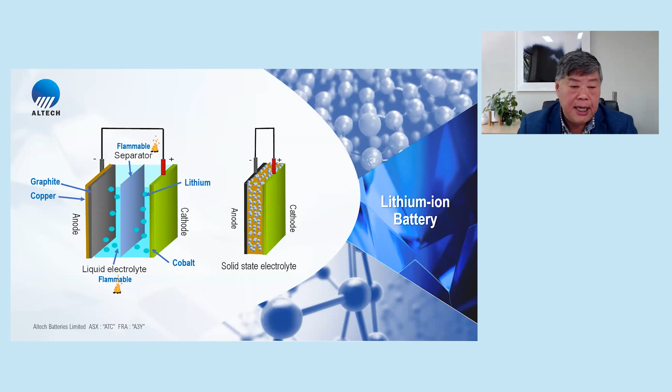In a normal lithium-ion battery, you've got a cathode and an anode, and there's a liquid electrolyte in between that, which has got lithium, but it's actually very flammable. What the industry is heading to is solid-state technology, where they're removing the liquid electrolyte and replacing it with a ceramic piece. The ceramic is a solid state, which allows the lithium to go back and forth without using that liquid electrolyte.

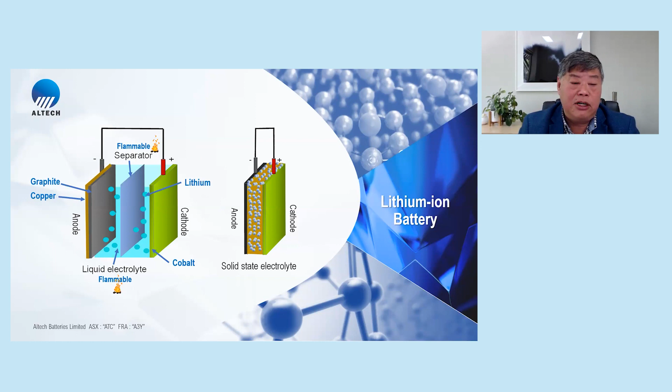So some of the challenges of the lithium-ion battery: there are fire and explosion issues. A lot of people don't realize that lithium-ion batteries only operate in a very narrow temperature range, down 15 degrees to 35 degrees. In fact, when you have your lithium-ion battery in the very cold, your battery slows down to about 70%. Also, there's a limited life of these batteries because every time you charge and discharge, lithium ions degrade, so generally 8 to 10 years in the bigger type batteries.

The other concern is critical metals. There are price rises in critical metals in these batteries, and that is also a concern. So let's talk a bit about that.

Lithium price has risen fivefold in the last 2 years, and that's causing some concern to the lithium battery sector. Cobalt supply, which is a key ingredient to some of these batteries, comes from the DRC, and there's some ethical concerns about child labor issues and so on. 90% of graphite comes from China, so the industry is concerned about geopolitical risk. Copper is an issue—there is a copper crunch coming. There is a study that shows there's not enough copper mines being built or developed to even meet the EV demand, let alone grid storage demand, and obviously also materials like manganese.

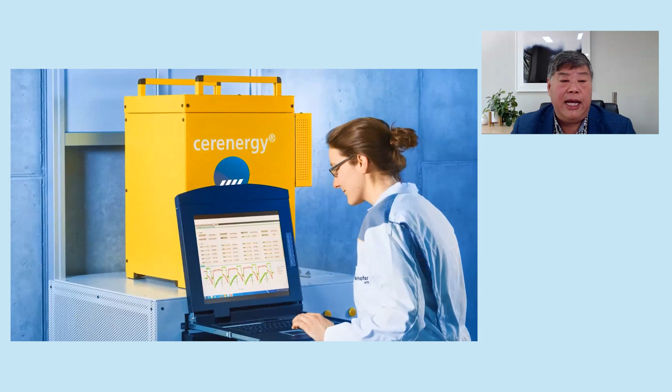Well, introducing you to the Cerenergy battery. Essentially, this is a sodium chloride battery, or salt battery, with nickel metal powder. So that's what they look like. The technology was developed by the Fraunhofer Institute in Germany. They spent nearly 35 million euros in development over 8 years, and we have a joint venture to develop this technology.

So it is actually a sodium chloride battery and solid state. It doesn't have that liquid electrolyte, so it uses a ceramic piece. Therefore it's fireproof, because there's no volatile, flammable electrolyte in the battery. The temperature range it operates: down to minus 40 degrees and up to 60 degrees. So you can plop this battery in the snow or in the desert, and it'll operate without any cooling fans and so on.

Because we use sodium, not a very reactive material like lithium, it doesn't degrade every time you charge and discharge the battery. So the life of the battery should be beyond 15 years. We don't use any lithium, as I mentioned—we use sodium chloride. We don't have any copper in the chemistry, so there's no copper requirements, no cobalt requirements. And there is also no anode in the battery—it's actually a self-forming anode, so we don't have any graphite or copper.

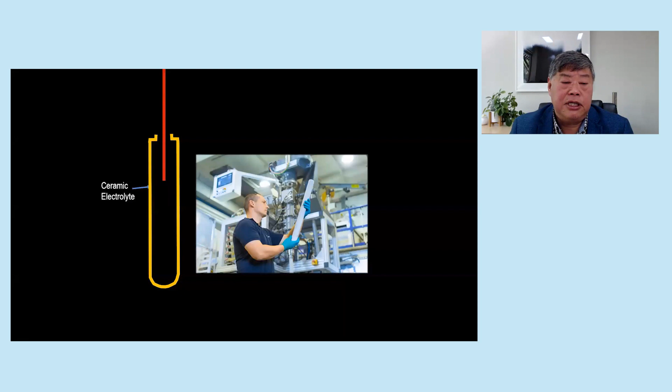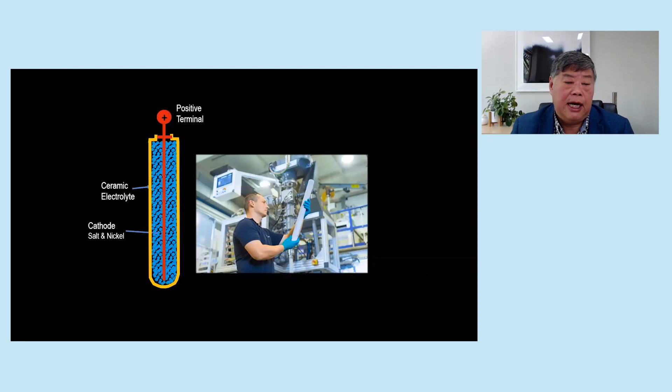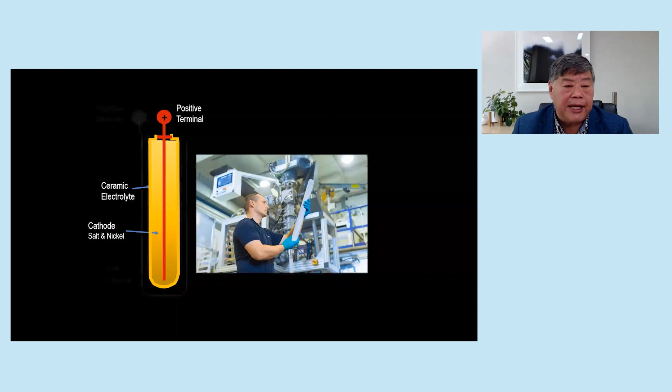So let me show you the technology and how this battery operates. Essentially, you have a ceramic tube, and in the ceramic tube there is a positive probe. We fill the ceramic tube with sodium chloride and nickel powder, and there is a medium of sodium alumina medium in it. The ceramic tube, as you can see in the picture there, sits in a metal canister, which acts as the negative part of the battery. So you've got the positive probe in the middle, and the cylinder is the negative part, as you can see in this picture of the ceramic fitting into it.

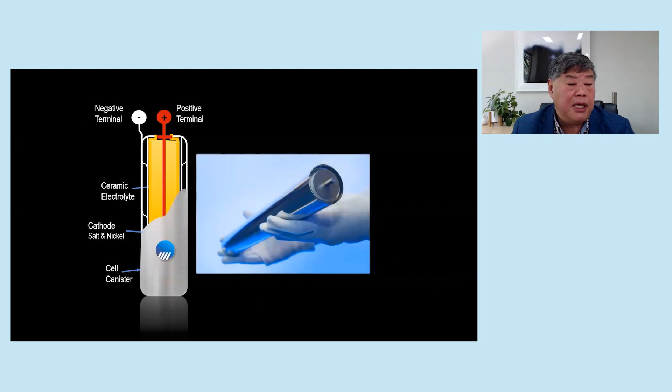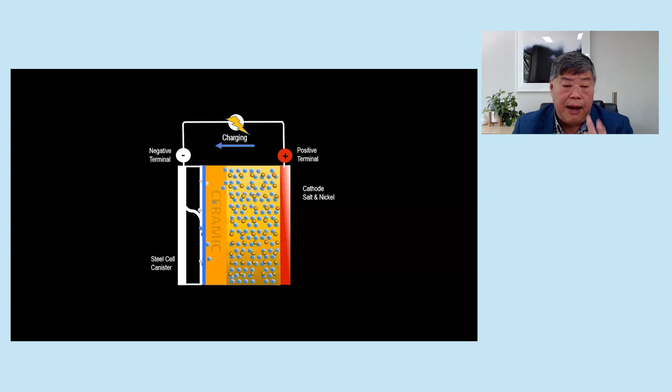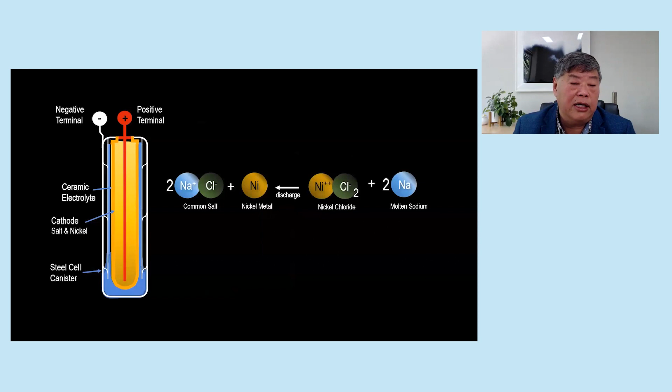This battery, the way it operates: when you charge the battery, the sodium ions migrate through the ceramic separator and build an anode—it's a sodium anode that's being formed. When you charge the battery, the nickel is there to grab the chloride and allow the sodium to migrate. If you take a cross section of the battery, you can see the molten sodium being formed. So the unique part of the battery is it's a self-forming anode and a self-discharging anode. Very unique technology. Here you can see the battery discharging—the sodium ions are now migrating back, grabbing the chloride and becoming salt again. Very interesting technology here.

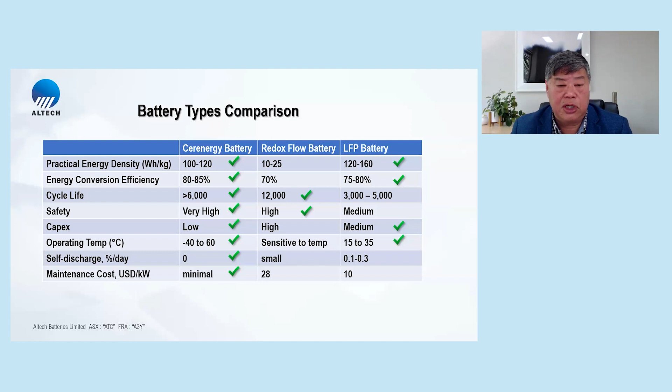The main point in this slide is the maintenance costs. It actually has virtually zero maintenance costs. In an LFP battery like the Tesla Megapack, there's something like 240 cooling fans trying to keep the battery cool. In our battery, it actually looks after the temperature itself, because when you charge the battery it's an endothermic reaction, and when you discharge the battery it's an exothermic reaction. So it monitors the energy.

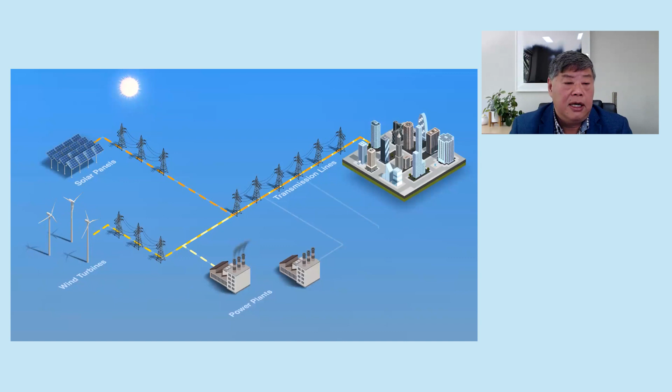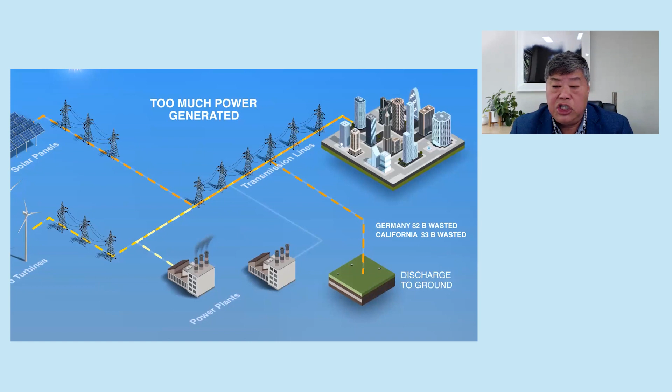Our market is actually the grid storage market. We're not looking at entering the EV market. If you look at this animation, we generally generate power during the day with solar panels and so on. But what a lot of people don't realize is that during the day, Germany discharges about $2 billion worth of renewable energy to the ground, and California something like 3 billion, because there's an excess of power during the day.

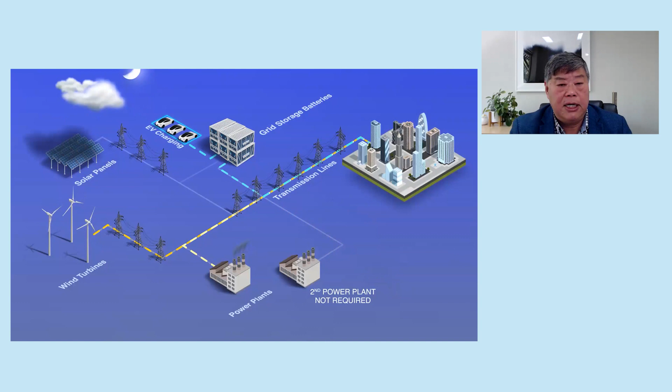Now the future of EVs, as more and more EVs come online, they're going to draw a lot of power during the night when they charge up, and so you actually need grid storage batteries. A grid storage battery just sits on the grid. Essentially during the day when the sun's out, they charge these batteries, and at night they discharge the batteries. It's an energy shifting exercise.

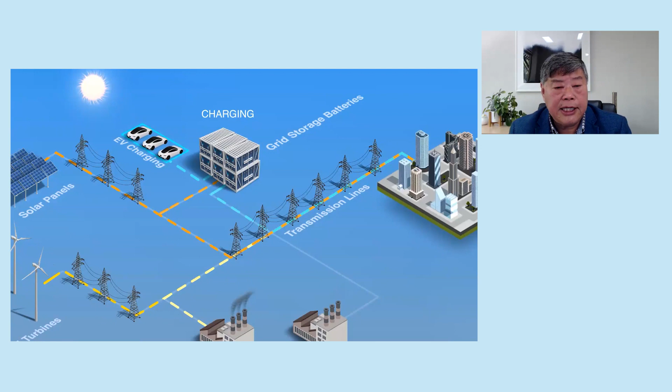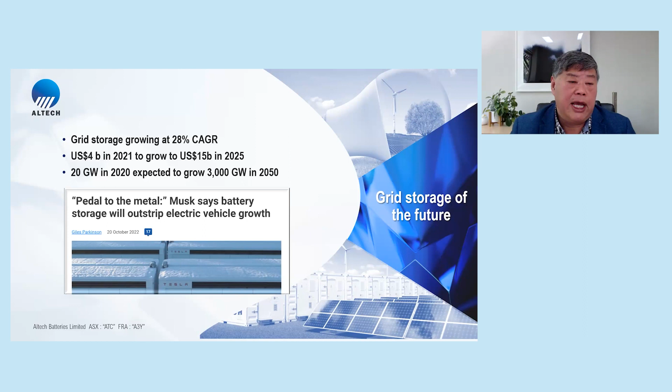Grid storage is growing at 28% year on year, and even Elon Musk has said the future of the battery industry, their battery production, will be the grid storage market. Okay, so let's look at one of these batteries being produced in essentially a pilot plant built by the Fraunhofer Institute.

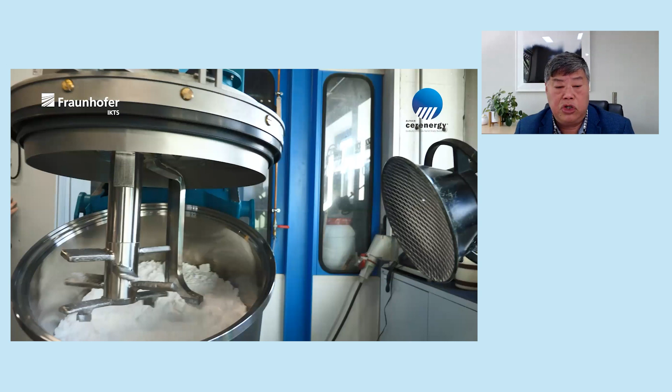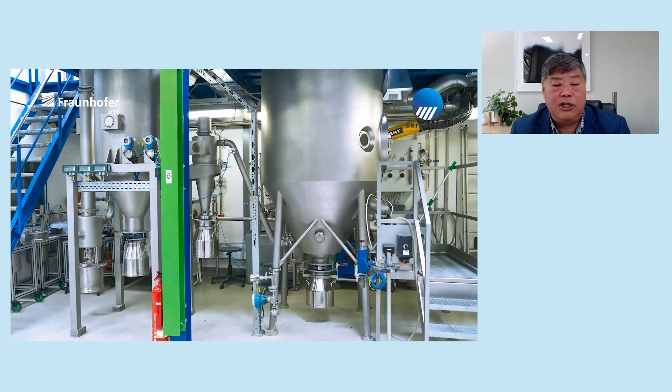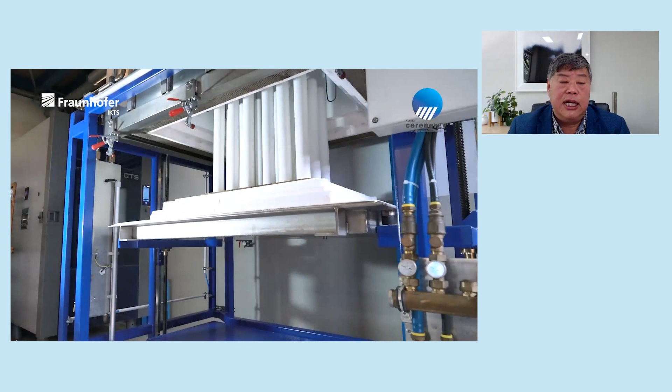We are producing these batteries now as a prototype. Here you can see the alumina being mixed. This forms the ceramic bit of the battery. The alumina plus any extra additives goes through a spray dryer, and these are then sintered in these kilns. So the ceramic piece is the solid state.

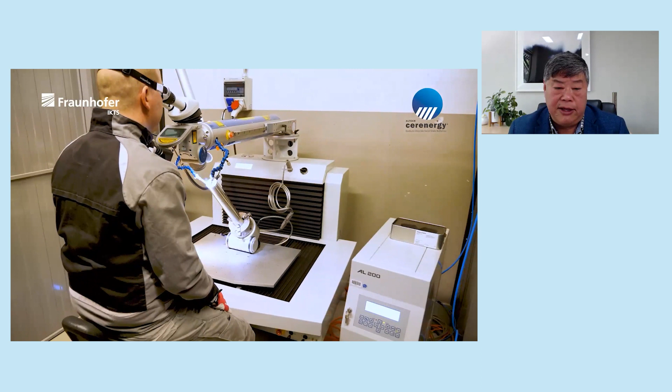Once this is formed, it's checked for quality. As you can see, you can pick up any defects by just using light. Here you can see the ceramic piece being assembled in the metal canister. The next part of the process is to add the salt and the nickel metal powder, which forms the internal part of the battery. Then the next step is to start welding these batteries together, as you can see in the welding process here, with some of these batteries undergoing tests under different temperature conditions.

Our joint venture is, we own 75% of the joint venture. We are building a 100 megawatt hour battery plant in Saxony, Germany.

As you can imagine, we are producing these cells at one every 45 seconds from scratch. So you can imagine that there will be a lot of automation and robotics, and Germany is a great country for that. There is a very strong automotive industry with a lot of automation and robotics.

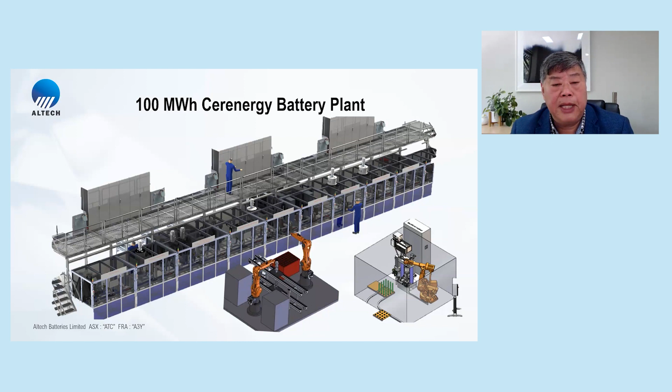Our first product is this 60 kilowatt hour pack, 100 amp hours, 600 volts, and you can see the cross section of it. There are 5 shelves of these 240 cells. What you notice is that there's no cooling fans on these batteries. They can sit in the snow and they can sit in the desert, and operate very well without any of those cooling fans and so on.

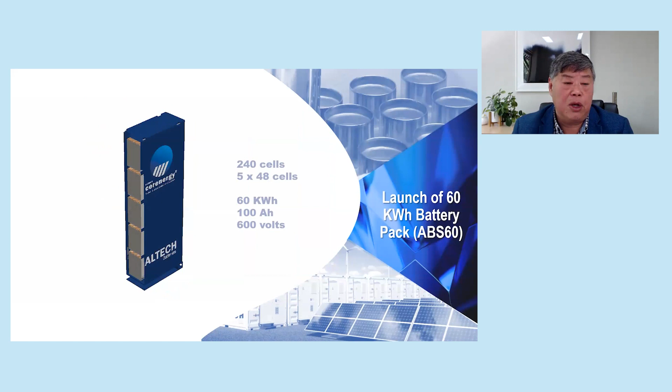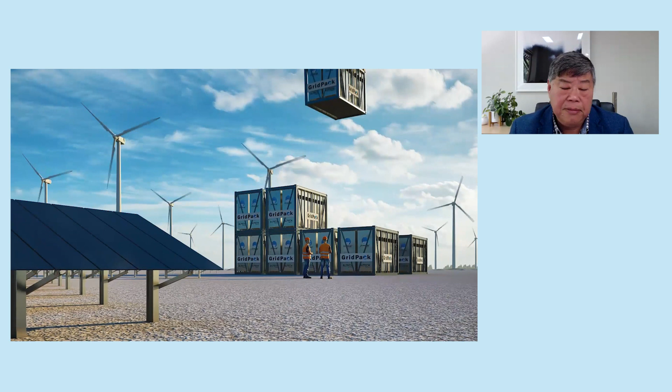These 60 kilowatt batteries will then go into our basic product, which is a 1 megawatt battery pack containing 18 of these 60 kilowatt packs. The whole idea is they can be delivered onto site without installation. You can drop it on the deck. It's a plug and play scenario, and within 5 minutes you've got 1 megawatt of battery storage connected to your grid. This is really the key to the grid storage market, where energy is being produced by these solar panels and so on.

So essentially, that's our business model.

Thanks, Iggy, great presentation. A number of questions have come through. Just in relation to the joint venture, I understand it's in relation to the project being built in Saxony. Does that cover everything from the joint venture, from the site to the pilot to everything, or is that multiple joint ventures? No, that's one joint venture.

We own now the technology, worldwide technology. We have the exclusive rights, so the patents that Fraunhofer have come under the joint venture. So the future is that we would then look at building gigafactories after this 100 megawatts. The joint venture owns all the technology, and no one has the right to license it without us.

Take us back to the start of the journey. Clearly, I remember even you talking to me about this project many years ago, and at the time it did seem like quite an adventure and something that certainly to aspire to, but well and truly ahead of your time.